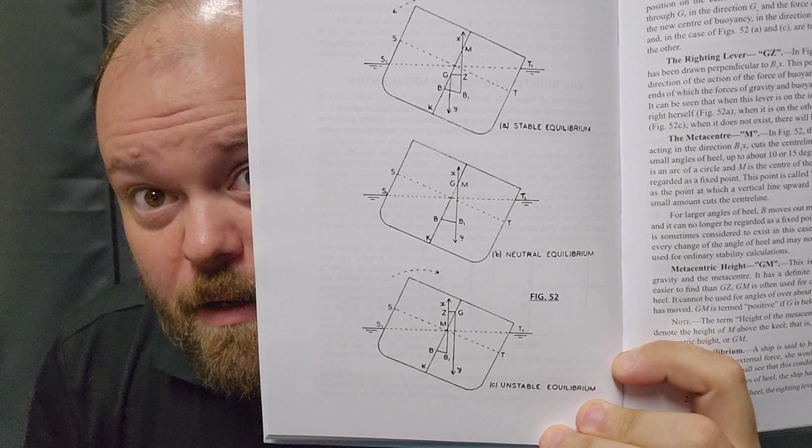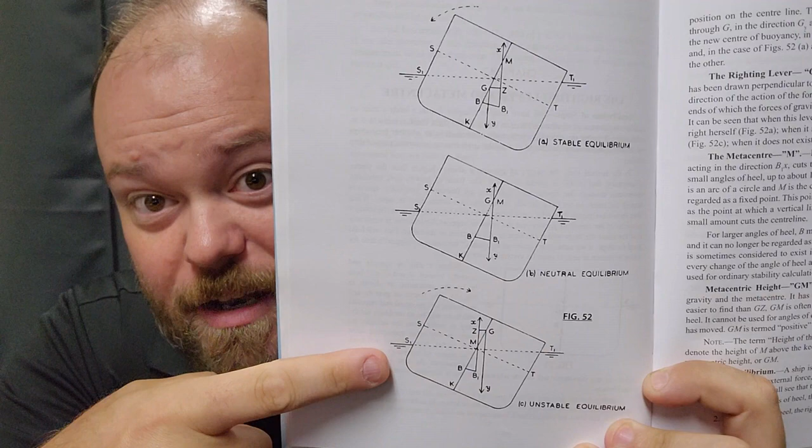And there's an awesome book I used back in college, Merchant Ship Stability, that explains everything about why boats lean, list, and sink, and flip over, and all that stuff. So I'm going to just show you a quick diagram out of this, and that will help explain why having water in your kayak is a bad thing. So this page has a stability diagram on it. At the top, we can see stable equilibrium, neutral equilibrium, and unstable equilibrium. So this would be unstable. This is what's going to cause your boat to roll over.

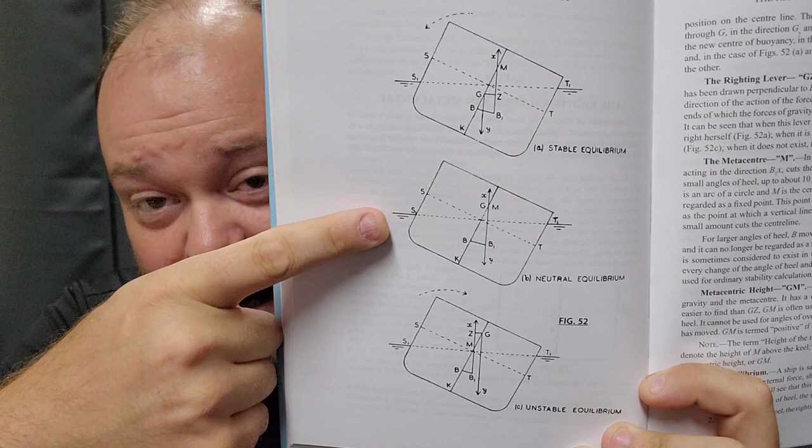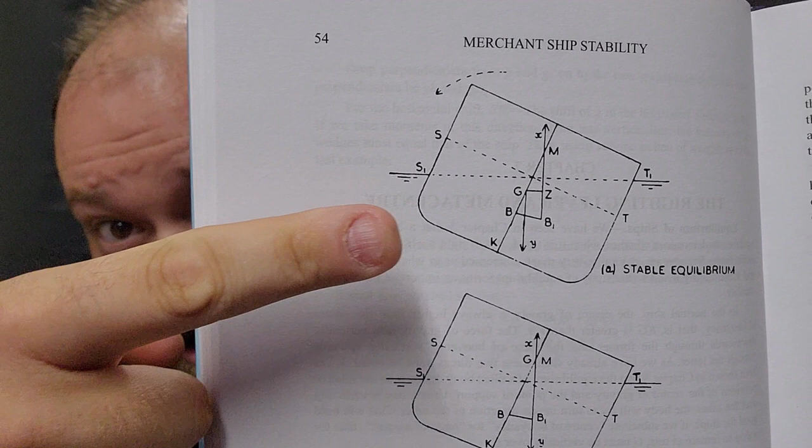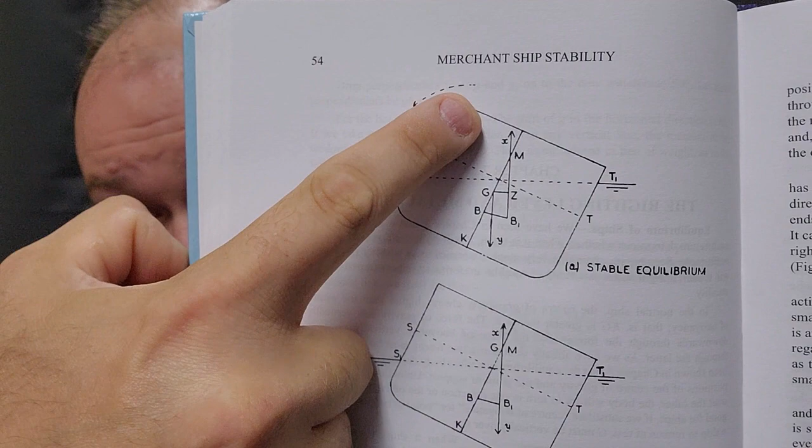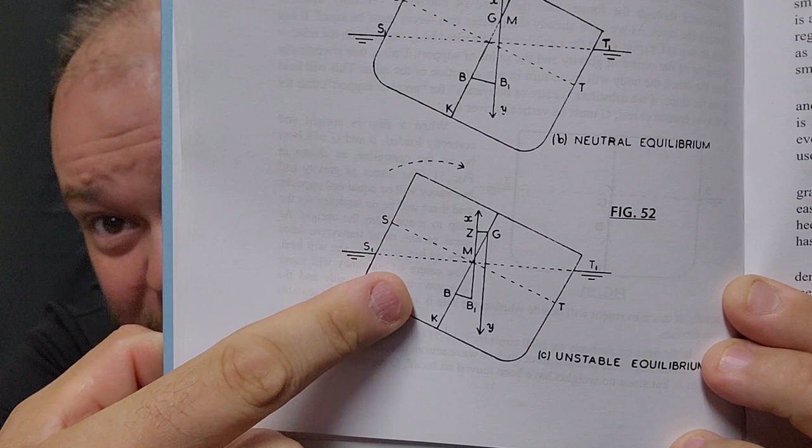This is neutral. This means that it's very, very tippy, and you'll probably have a list happening, which is what I had on the river. And this is good. This means that you're resistant to rolling over. So if you look at this top diagram here, you'll see that G, that's your center of gravity, and M, your metacenter, are in their proper orientations. If for some reason your G ends up above your metacenter, you end up with this diagram. You can see here we have our center of gravity above our metacenter. This means we're going to roll over. Bad stuff. You can see here they're basically the same. Also not great. This, good. Center of gravity below the metacenter. That's what we're after.

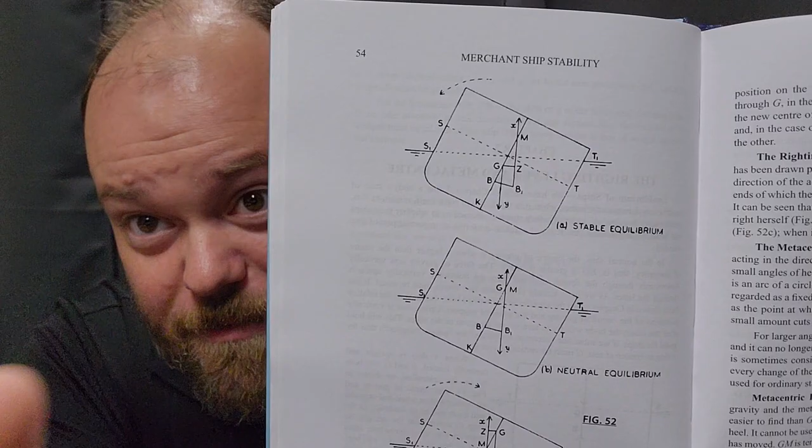So why is the distance between G and M important? Well, because every time we add weight to our boat, we are raising our center of gravity. That G is going up towards the meta center. So when you're at or near the manufacturer's recommended weight limit, your GM is very small. That means that your ability to right yourself is also very small.

The bigger that distance between G and M, the better your ability to right yourself, and the better your ability to stay in an upright position. So if you add so much weight to your boat that your center of gravity is above your meta center, she'll just roll over. You're going to capsize. There's nothing you can do.

So here we are looking at the kayak. It's a Pelican Boost 100. I installed this hatch before my trip down the Saugeen, and I only used the foam gaskets, so I don't think it's adequate. So in there you can see there's not much water. Not much water at all in there.

I went ahead and put the action camera in there, and I'm gonna hit it with the garden hose on the highest setting I can get, and we're gonna see how much water gets in there. Here we go. Jet, that's what we want. All right, here we go.

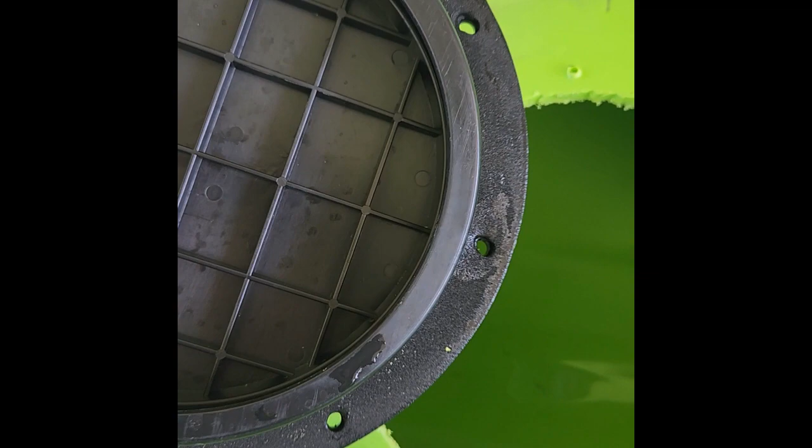That's not what we want. Oh, look at that. That was up at the front. That's the front corner. Oh man, no wonder this thing leaked. Yeah, foam gasket, not adequate. So this is the hole I'm working with. You can see where the screws all went in.

You can see along the edge, I did sand this when I installed it, but obviously I didn't do a good enough job. So I'm going to come back with a little bit of sandpaper and just clean this up a little bit. Yeah, look at that. Oh man. So I took some 220, I put it in there, sanded it up.

All right, so I've put the sealant on and I've resealed the hatch. It's always good to remember to use more adhesive than less. I mean, obviously you don't want too much, but otherwise you end up with a nice clean hatch like that. That's what I'm after. So in 7 days I'll be able to test this. All right, so we got a nice clean install, this time with 3M 5200.

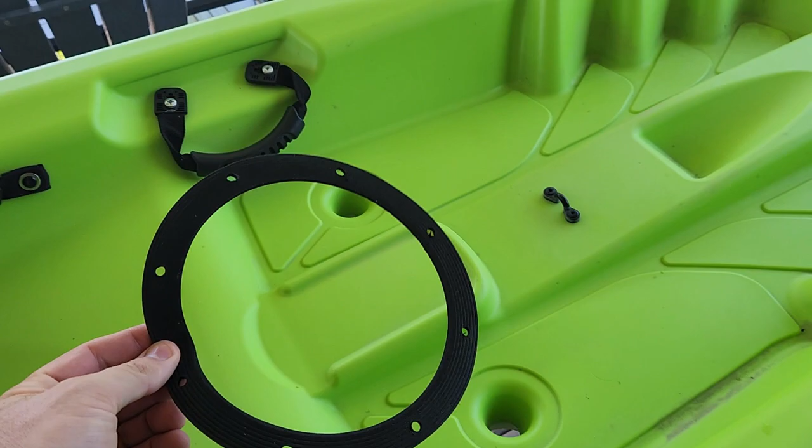This thing, useless thing, that's going in the garbage, or maybe I'll keep it, I don't know. It's approximately the same size as that hole, so yeah, maybe I'll keep it, why not? Other than that, it's all done for another week, so I'll see you guys in 7 days and we will test that hatch again.